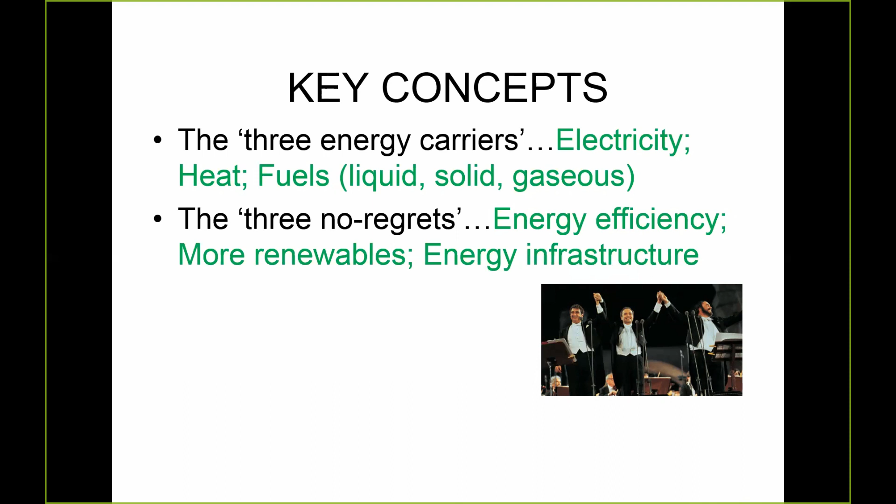Three no regrets - this comes from the European Union. They adopted this as policy some years ago, that whatever the outcome in the future, there was no problem with energy efficiency. I'm not going to say much about energy efficiency except to say that's a given, and any smart energy system will focus on energy efficiency in the first instance. More renewables, no regrets about that. And improved and more energy infrastructure, appropriate to the new system.

And as I was writing this, I thought about the three tenors. I thought, oops, and then I thought maybe I could put a photo of the three tenors in there just as an aide-memoire to the idea that there are these various groups of three ideas - and to think about their wonderful music as well.

So now there are three other ideas which come into this. Energy storage, which becomes increasingly important - the more renewables, particularly variable renewables like solar and wind, and to some extent hydro, in the system, the more important storage becomes. Allied with that is the idea of energy spillage. If we have enough storage in an energy system, there'll be no spillage, but sometimes there's not enough storage, or sometimes it's too expensive to have enough energy storage.

In some cases, we might even want to design a system deliberately to have spill - that's something I'll elaborate on further in the talk. And the third of this last group: energetics, a way of evaluating the success of the system. I'm not going to talk about economics as a way of evaluating success. As an engineer, I'm interested in the laws of physics, the laws of thermodynamics, and how they relate to our assessment of the system - that's what I'll be focusing on.

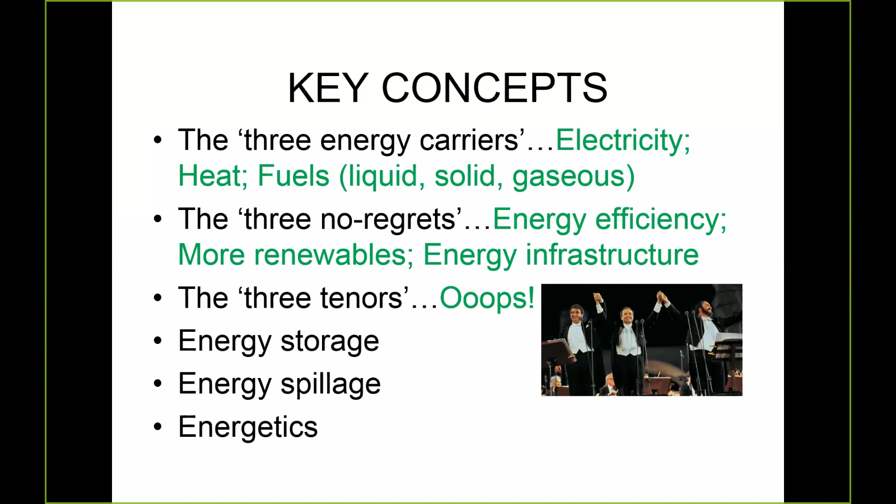I want to have a closer look now at our energy resources. In the left-hand column there, you can see the main ones listed.

So we've got solar, wind, hydro, biomass, geothermal, and the key conversion technologies there. What I want to do is look at the energy products from each of these.

Firstly, solar thermal produces heat, generally low-grade heat. Solar PV and concentrating solar thermal produce electricity. Wind, electricity. Hydro, electricity. Biomass is interesting because it gives us a variety of options, but electricity is one of those. We can produce hot gases by burning stuff, and we can get liquid and solid fuels out of the biomass resource. The wave and tidal machines can produce electricity, and geothermal gives us electricity and heat as well.

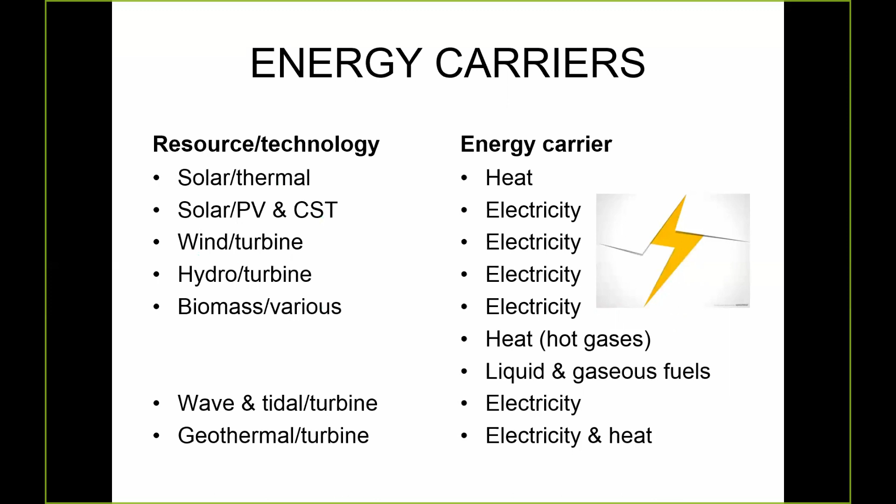In terms of energetics, we have this term called energy returned on energy invested. You may remember from some years ago, people talked about making ethanol from corn and how it didn't break even on an energy basis. I think those days are gone.

As anybody that's worked in this field knows, this is derived from life cycle analyses, and that's fraught with difficulties. It depends where you draw the system boundaries, what sort of data you have, and a whole lot of other factors. And what it means is you can get a very wide range of figures for the EROI values.

So the Americans talk about energy return on investment. I like to be a bit more specific: energy return on energy invested. But we need to take this with a grain of salt, though there is a general trend. Generally speaking, hydro is better than wind. Wind is better than some of the biomass conversions. They're better than geothermal to electricity, and that's better than PV, and that's better than other biomass. So going back to the laws of physics, it really behoves us to use the technology and the resource with the highest EROI value, if we have the choice, in order to do that.

Now, there are other factors involved as well, such as greenhouse gas emissions and land area requirements, which can tweak that order somewhat. So generally speaking, I'm going to go ahead on the assumption that this is a sensible order of choice of technologies to make.

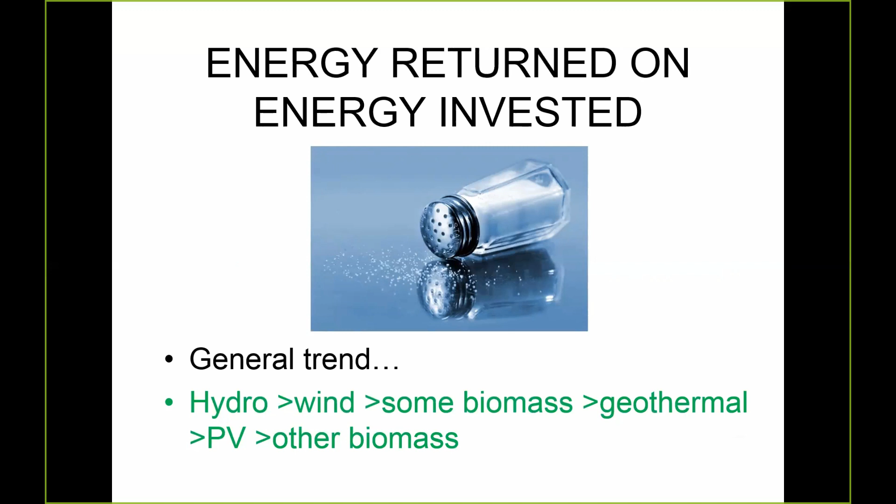So what's a smart energy system? I'm going to take the definition from this paper by Danish researchers, Mathiesen, and you might know the name Henrik Lund. He's been kind of the grandfather of energy systems research over the last decades, a really powerful figure. Very interestingly, he's in the Department of Planning, not an engineer as such. But I think this is one of the most important papers that's appeared in the energy literature over the last 10 years.

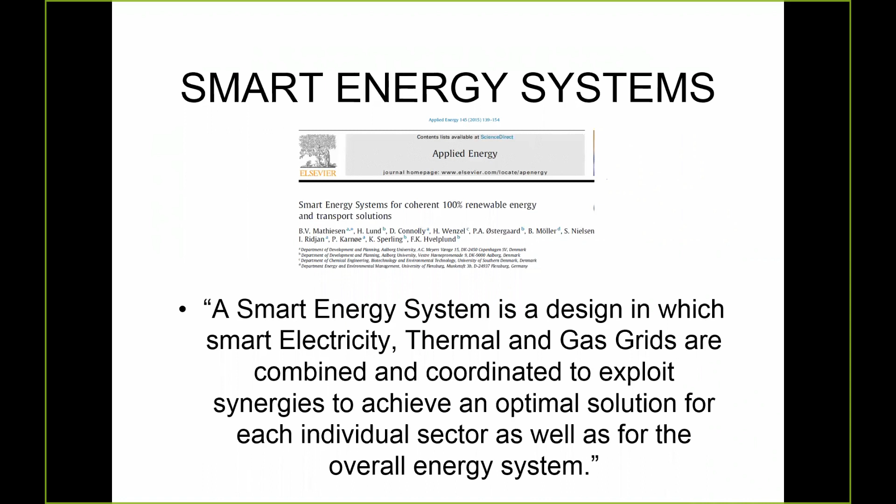Their definition of a smart energy system is this, and I'll just read it out so we can get a good feeling for what it is. It's a design in which smart electricity, thermal and gas grids, with emphasis on the grids, are combined and coordinated to exploit the synergies between them to achieve an optimal solution for each individual sector, but also for the system as a whole. That's what really interests and excites me, this idea of optimizing the interactions between these various energy carriers.

The Danes have been working on this for a number of years, since about 2006. They really got serious about being free of fossil fuels by 2050. That was their idea, and that's still government policy in Denmark at the moment. Their Climate Commission reported in 2010 and came up with this diagram.

I'm not going to go through it all in detail, but there's a few key things to note here. First, electricity from wind is one of their primary energy resources looking to the future, and also using quite a large amount of biomass. But we can also note a little bit of wave, some solar panels, some solar thermal, use of heat pumps, and use of geothermal.

This is combined heat and power plant, so that's electricity plus heat output, with large thermal storage—very large hot water tanks, basically—using district heating in built-up areas, industry being part of it, and electrification of transport to some extent as well.

There's one key thing I want to focus on: Denmark has a land border with Germany, it's close to Norway and Sweden, and they're even talking about building an HVDC cable across to the UK. So they can balance their electricity system easily by importing and exporting electricity with other countries. They use Norway as their storage system - they sell cheaply to Norway, and then the Norwegians sell it back to them at a high price. That's the beauty of the market, I guess.

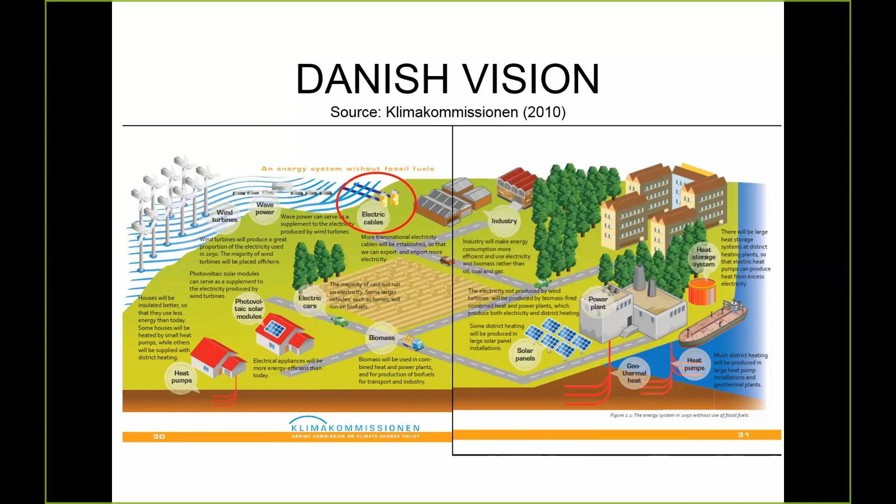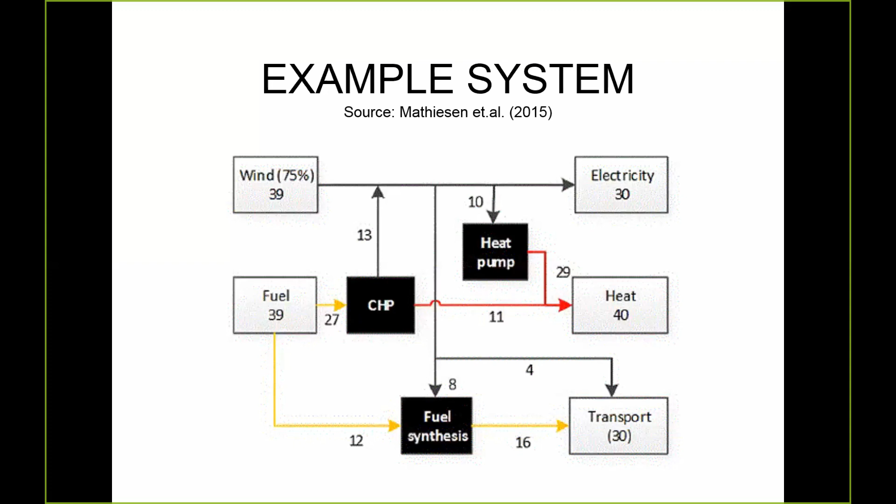Now this is for Denmark. The highest point in Denmark is just about 200 metres, I think, or maybe a little less. So as I said, they use Norway as the storage system. In New Zealand, we're lucky - we've got a very large battery called the Hydro Lake. It's about 4,000 gigawatt hours available. And so that's how we can balance our electricity system in large part.

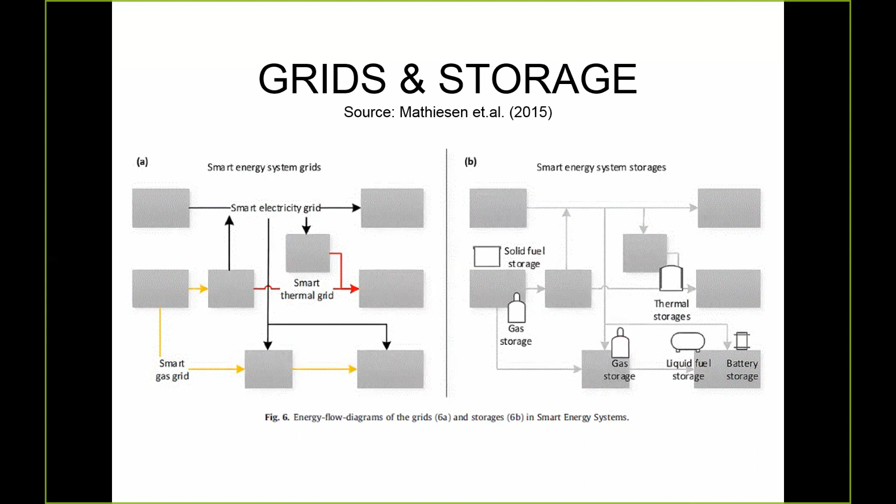So that's the general idea of the smart energy system and the idea of the interactions between the various sectors.

So those last categories, they make up very little individually, but you add them all together and they become quite a significant part of the whole mix. So it's worth thinking about those because of the accumulative effect.

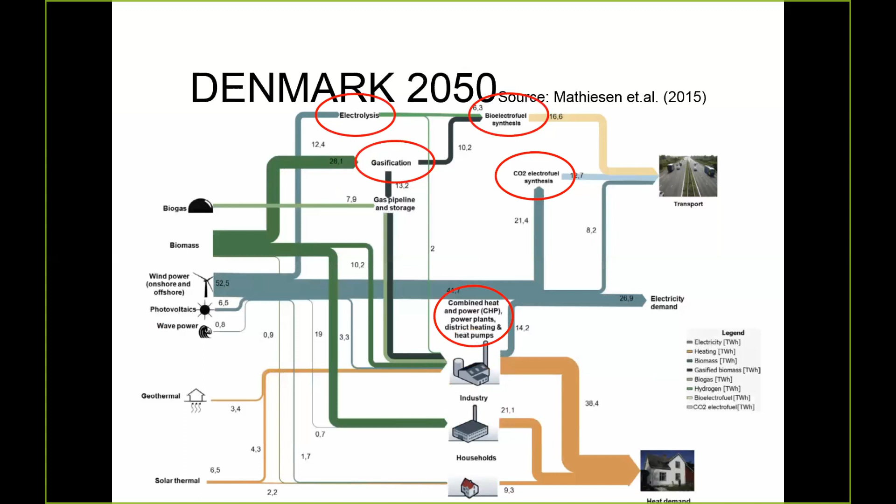Combined heat and power plants are a key feature of the Danish system, along with district heating and heat pumps. So that's the idea of interrelationships being quantified and the relative size of the resources in their particular role.

So I want to leave Denmark behind now and come to New Zealand and see what are the prospects for us to start thinking about such a system. How do we compare with Denmark? Well, we've got much better solar and wind resources than they have. We've got a milder climate, we're a bigger land area, we're a slightly smaller population. So if the Danes can do it, surely we can do it.

But we do have some disadvantages. We're not linked to any other country in terms of electricity. Although I believe people have talked about an HVDC link to Australia, but well, they have telecoms cables, so why not? But that's a long way off, if ever.

We tend not to have district heating. We have it in hospitals, we have it in universities, but we don't have it on a big scale. So combined heat and power probably isn't something that's going to work well for us, at least not with our present infrastructure. We have a gas grid in the North Island, but not in the South Island.

One of the things the Danes really cottoned on to was the economic opportunities to develop new industries, expertise, and products, and sell those to the world, and they've been quite successful in doing that. But we're a long way from markets, so we have to think seriously about what we can actually produce, and what expertise do we have on which to build, which the Danes and the Germans and others who are really leading the charge in this area, don't have.

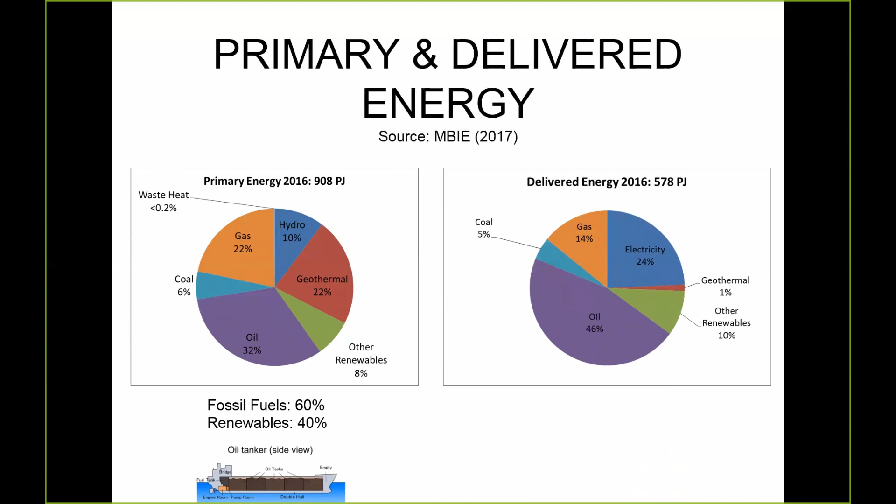In terms of delivered energy after the energy conversions, it's still pretty much the same picture here, still dominated by oil, mainly in the transport industry, some coal, some gas. You see the geothermal has really shrunk there - some proportion has gone into the electricity sector, so that 1% is just the heat used in geothermal applications in some parts of the country. So that's where we're starting from.

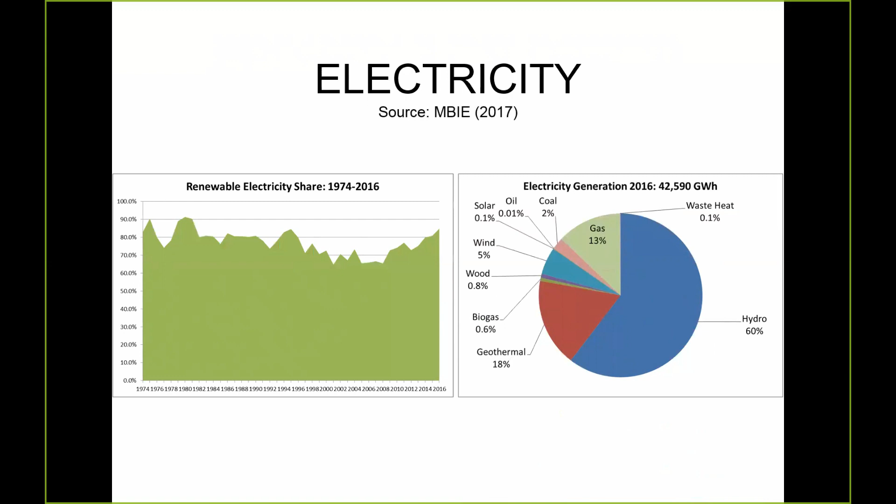In terms of the electricity sector, we've been quite highly renewable in the past. I think if you go back to the 1950s, we were 100% renewable at times there. In 2016, we produced about 42,000 gigawatt hours of electricity, primarily from hydro, with a large proportion from geothermal, and large proportion from gas, and then minor contributions from other bits and pieces of renewables. That all adds up to 85% renewable electricity and 15% on fossil fuels.

What we're seeing now is a move towards 90% and over 90%. My own argument is that 100% renewable electricity is well on the way. It's happening. There's a little bit of fine-tuning to do, but it's really not the major challenge which we face anymore.

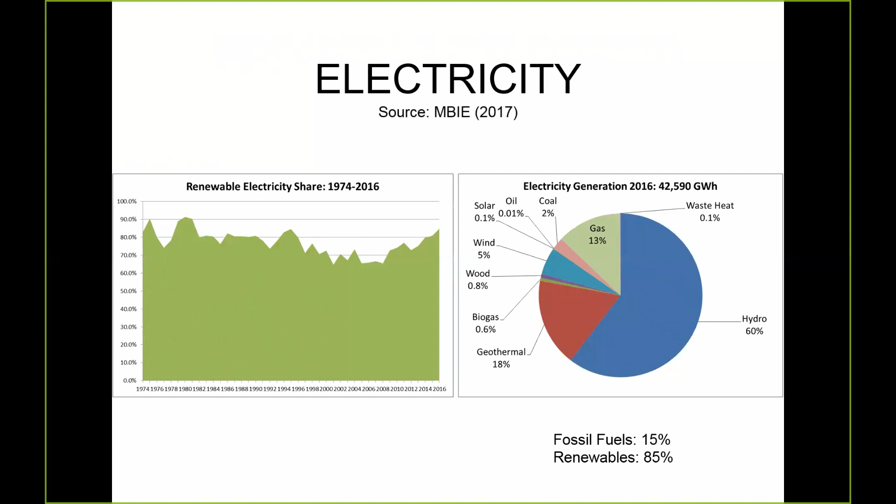So I'd like to talk about some arguments which were put forward by us some years ago as to whether we could have 100% renewable electricity. I'm doing this as a basis for a largely electric energy system. So if we can get the current electricity sector to 100%, then we should be able to use that information and knowledge to get the energy sector close to 100%.

So we studied for 6 years. It took data at 30-minute intervals and removed all the fossil fuel generation from the energy mix in the electricity sector, and we added in wind and geothermal.

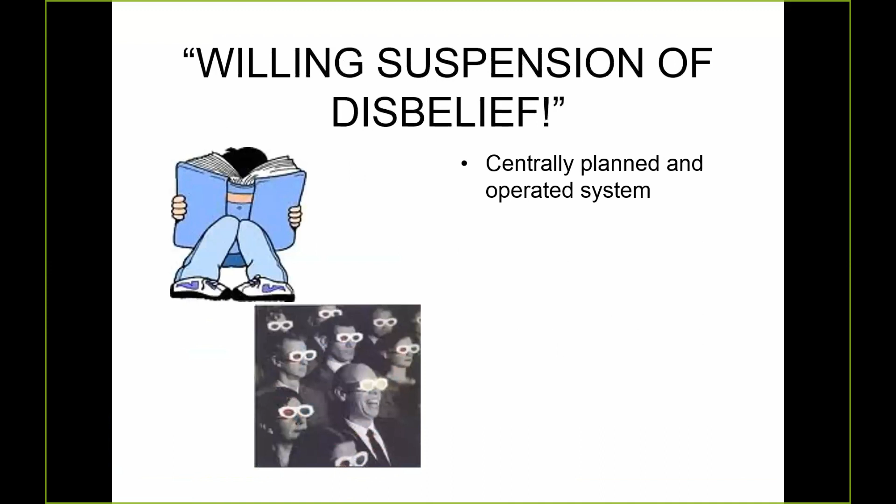There's a number of assumptions in the study. First, that the whole system is centrally planned and operated, and that the single goal people had was just to make the best use of the energy resources, and that included minimising spillage. So there's no market involved in here.

We varied the hydros in response to the availability of wind - so when wind was up, hydro was down, and vice versa. That was varied from the historical way the hydro lakes were operated. And we treated the hydros as one big bucket. The argument there was that they're not connected geographically, but they are connected electrically. So that seemed like a reasonable assumption.

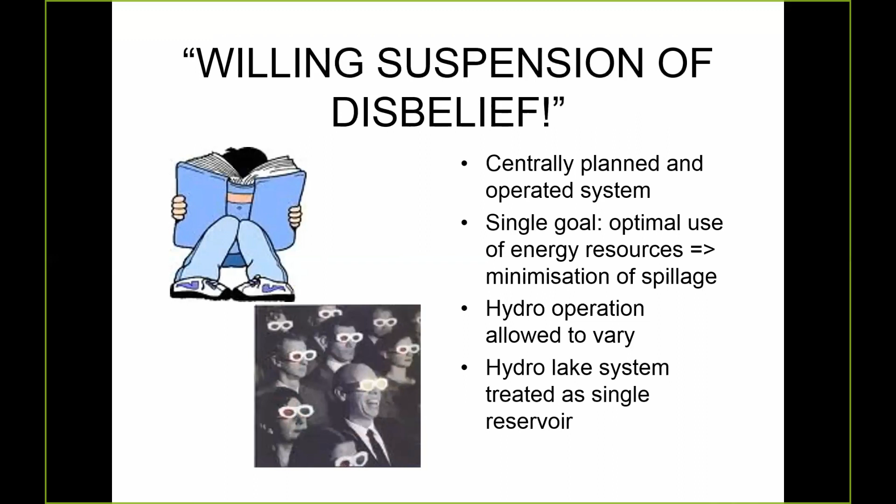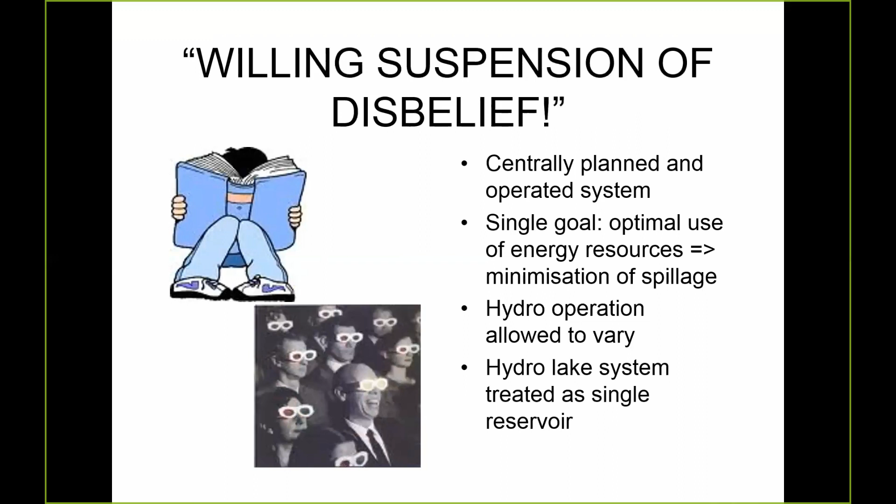A PhD student at the moment has actually separated the North Island and the South Island storage in order to get a more fine-grained analysis. And this is a backcasting study, so we have perfect information.

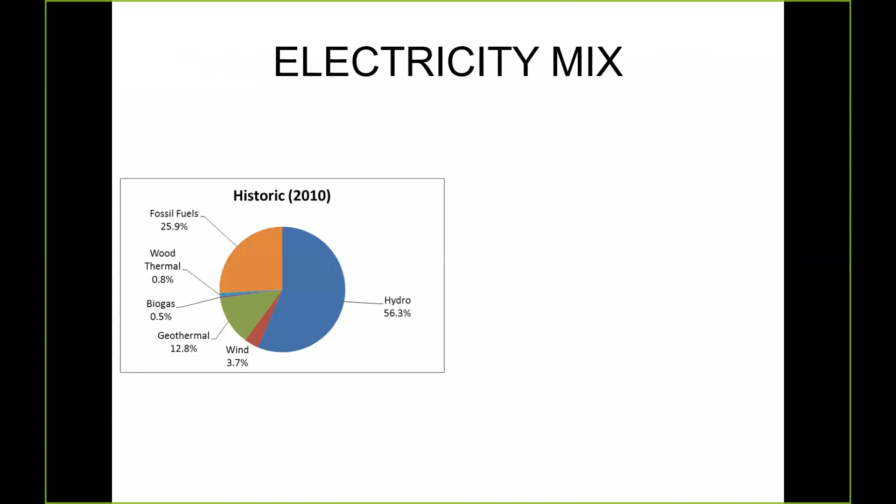This is the historic energy mix from 2010, and it's pretty much the same story that we just saw before in the overview of New Zealand.

With our 100% model, we found that hydro was producing pretty much the same amount, but there was a vastly increased amount of wind. There, a lot more from geothermal, and the biogas and the wood thermal were just as they were - they weren't altered at all, so they're still very, very small contributors.

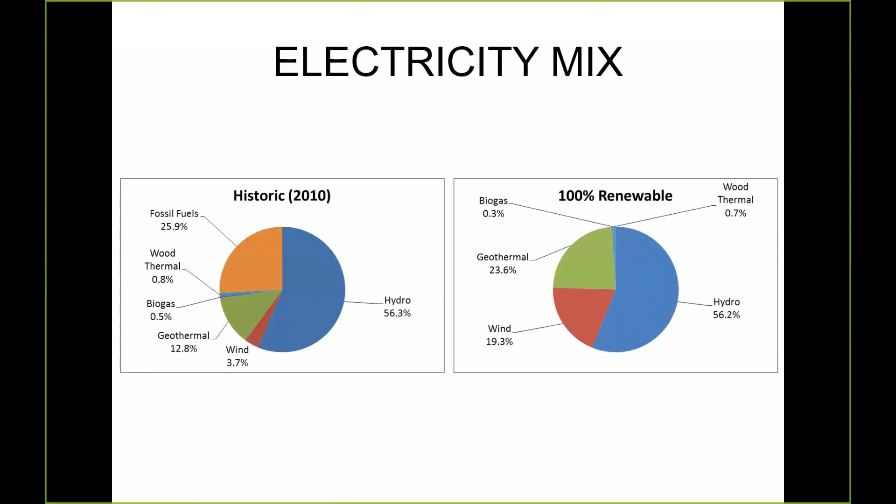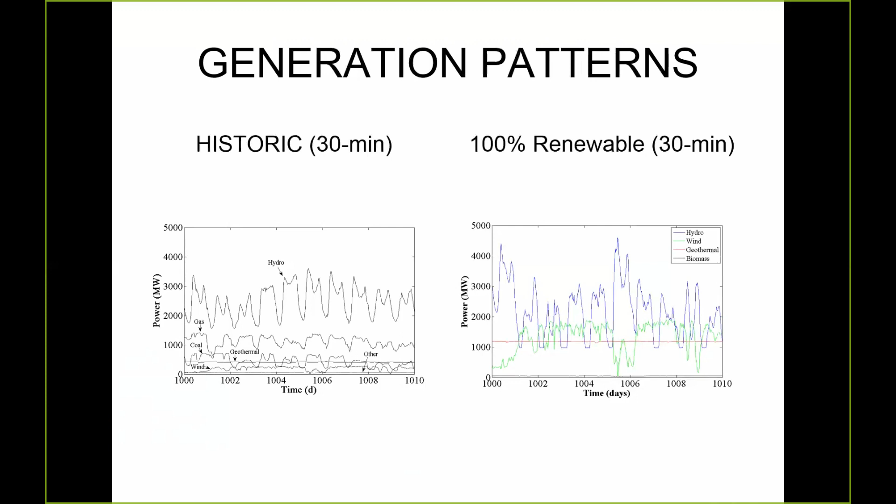And the geothermal is increased here, and we just operated that at constant base load. Now, geothermal can be dispatched, and I'll talk about that just in a moment.

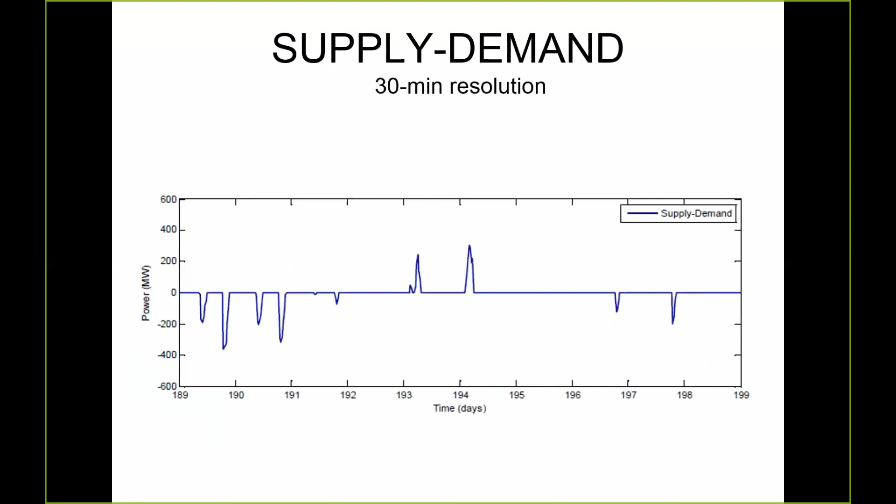In a system like this, there will be periods which produce surplus electricity, and there'll be other periods which produce deficits. So those deficits have to be satisfied. Now, if we're lucky, the amount of surpluses will exceed the amount of deficits, and we can use those surpluses in some kind of storage system to supply the deficits.

So let's see. This is over 6 years. This is the cumulative surpluses over 6 years in gigawatt hours, and this is the cumulative deficits. So we can see, yes, there was plenty of surplus there.

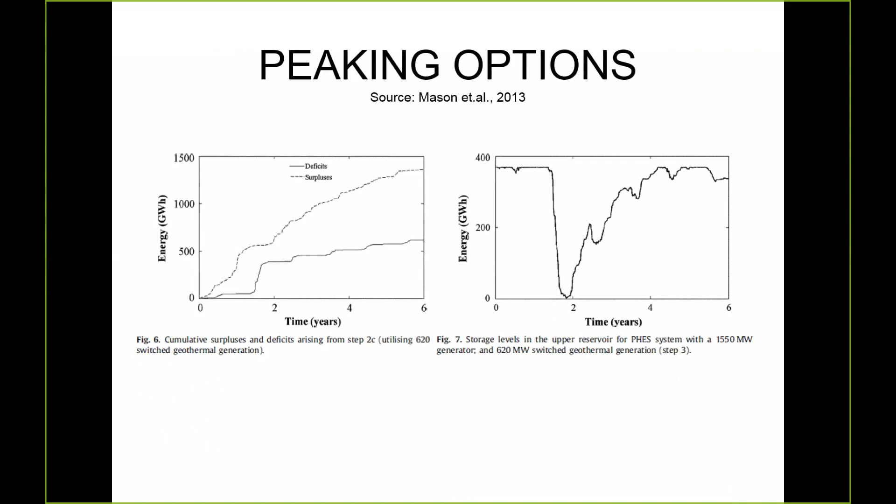So we modelled the pumped hydro storage system over the 6 years, and that had a capacity of 368 gigawatt hours. That's just under 10% of the total hydro storage we have at the moment.

But the interesting thing, and slightly concerning in a way, is the very high capacity required. That's because there are periods when generation has to ramp up very quickly and over a very large range, when the wind drops off, or when demand increases, or if both happen at the same time—you can't control that. As alternatives, we looked at demand-side management to see whether it could alleviate some of this peaking, and it could do some of it, but not all of it.

The other option is to just abandon the 100% renewable idea, and we calculated it would be 99.8% renewable if we use fossil gas in gas turbines as a way of meeting these deficits. I've argued, and continue to argue, I'm not too worried about 100% versus 99.8%. The truth is not very much gas gets burned. We need to maintain the fleet, but we don't burn a lot of gas. There are some commercial challenges around that, but people are starting to talk in that way. There was an item in Energy News just recently arguing the case for gas. So I think that's definitely an option, at least as a transitional measure.

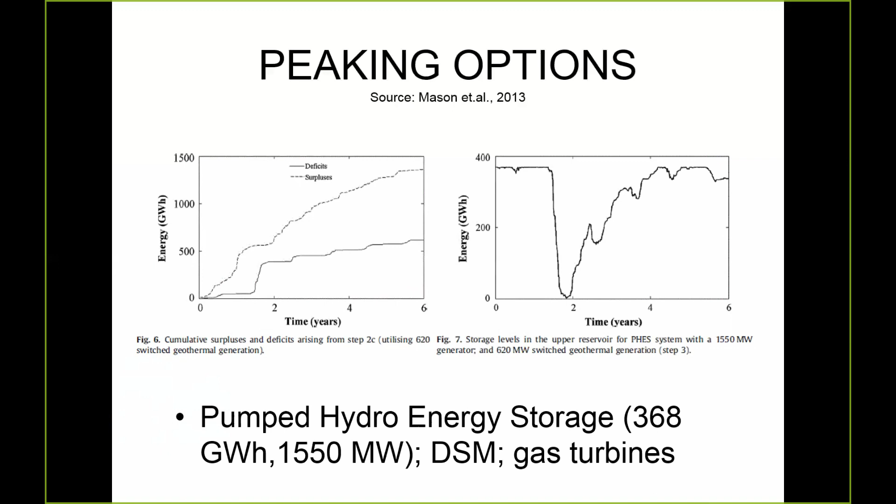It did raise the interesting debate, which I think is still current, of whether it's better to spill water, or to spill wind, or to spill some other energy resource. That's not really resolved. But one thing we can say about geothermal is that resource can stay in the ground—you can turn off the valves and not operate, or operate at lower output, and save that resource for another time. So we're relying on that.

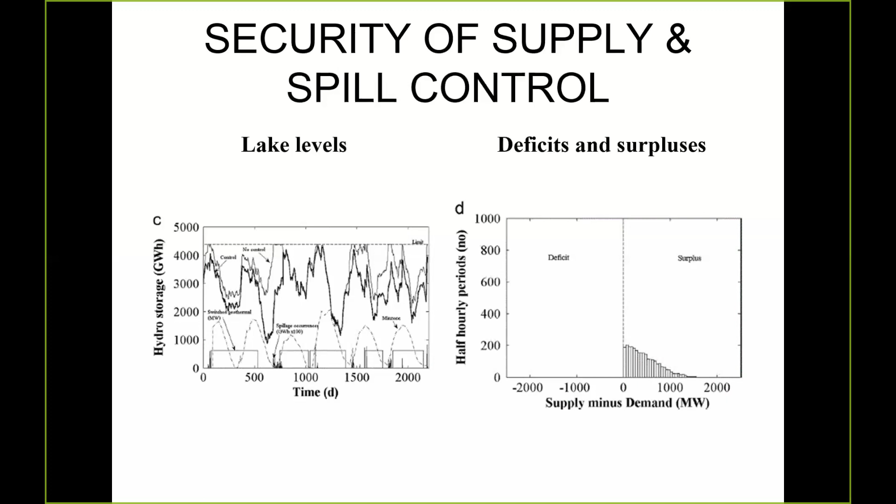Okay, so the argument to this point is that there's good evidence that we can have, at a 30-minute resolution, 100% renewable, or very close to that, electricity system. There are some issues at the sub-30-minute level which need to be addressed, and I'll mention those briefly later on.

But the next interesting thing to consider is whether the storage can be reduced and the whole system can be optimized.

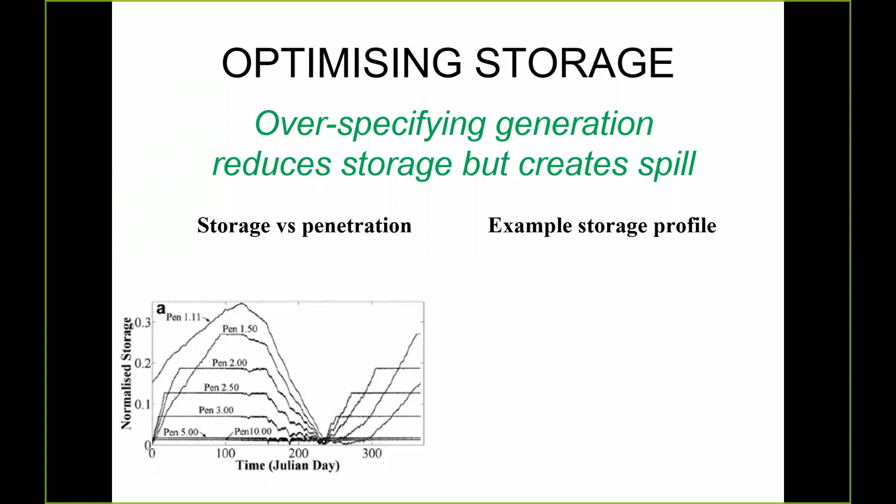So can we reduce this? If we put in twice the number or 3 times the number of panels, then the storage required goes down dramatically. That's because it starts to shave off some of those deficits and makes them a lot less. But it still produces spill. So in an optimized situation, the profile would look like this.

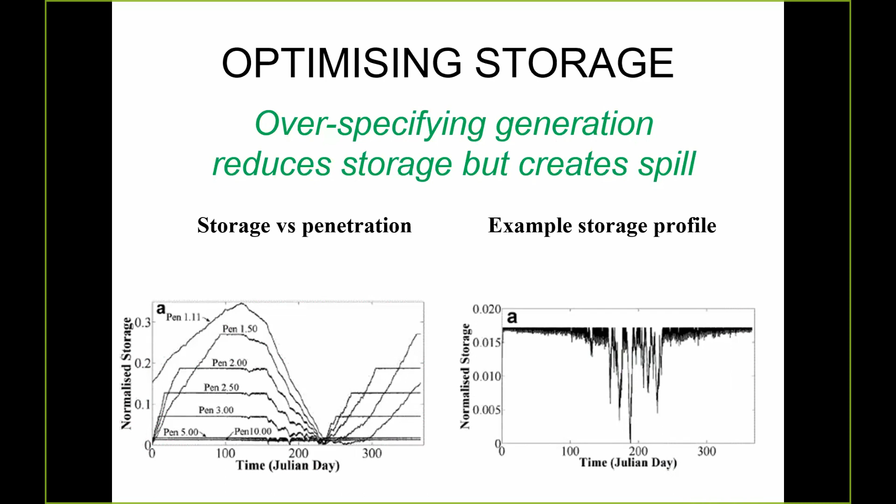This represents spill, where it flatlines along here. This is where it bottoms out. And then this is around September, and then it creeps up again. So that's something I'd like to argue could be built into a smart energy system of the future - to over-specify generation in order to optimize the whole system.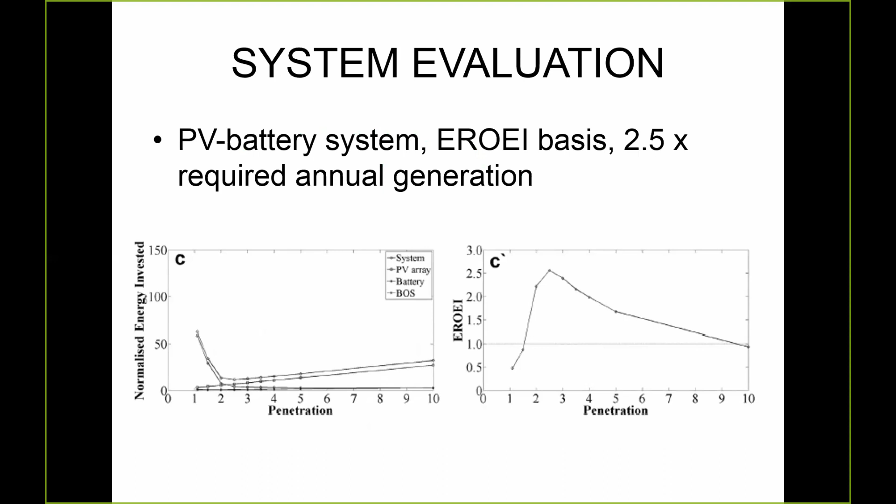So at the end of the day, with high renewables in the system, we're left with periods of time when there'll be surplus. So what to do about it?

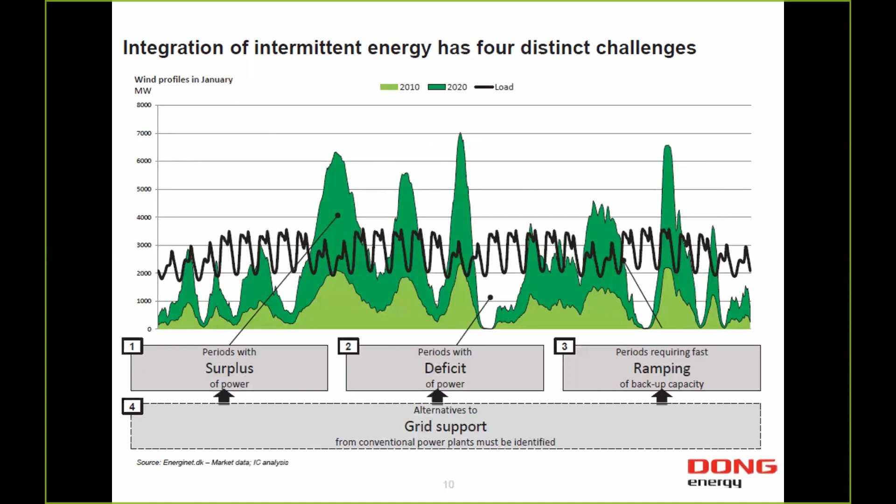We can use that surplus electricity to produce hydrogen and then put it through a fuel cell back to electricity. A lot of researchers, including myself, don't favour this route because of the very low round-trip efficiency.

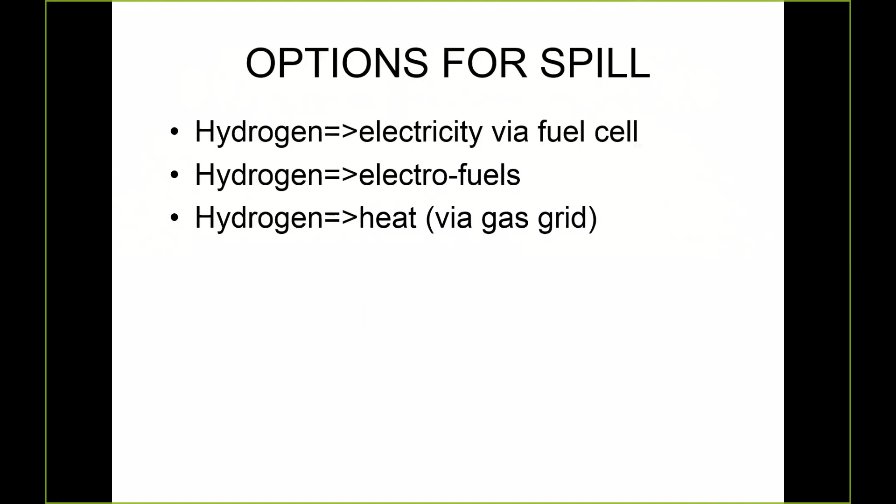We can use hydrogen as an input into electrofuels production, as we saw in the Danish scenario. We can use hydrogen directly as a combustible fuel, and maybe inject it into the gas grid, as they're doing in Northern Europe at the moment. Or thermal storage via heat pumps, which we saw in the previous slide. Just thermal storage in hot water tanks, which we saw in the Danish pretty picture.

Or curtailment. So there's an interesting study, I think, to be done - storage versus curtailment - is there an optimum point at which you curtail versus when you actually use it in some way or other?

So this is a diagram from a North German company, which is taking surplus wind electricity, putting it through an electrolyzer. Wasserstoff is the German word for hydrogen. That's been injected into the gas grid and sold to customers as wind gas. That's going on in many parts of northern Germany at the moment.

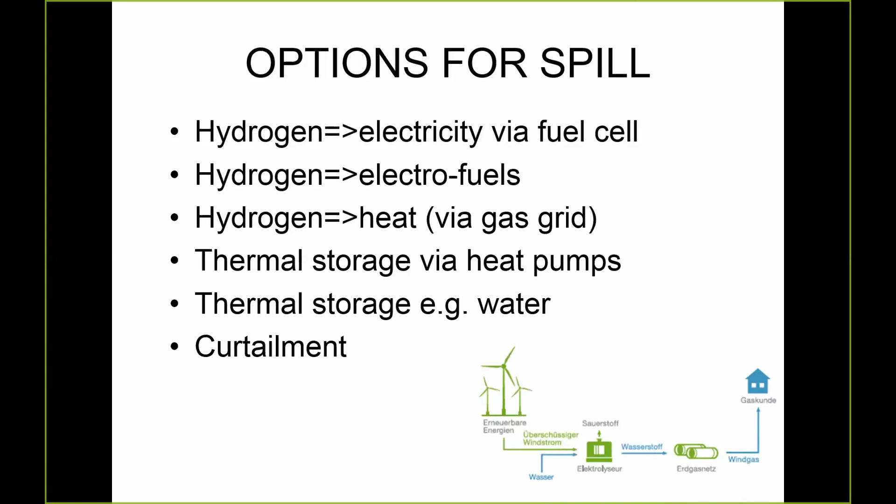So, can be done. Now, what about the question of 100% renewable energy? Moving now from electricity, the next topic is energy in total.

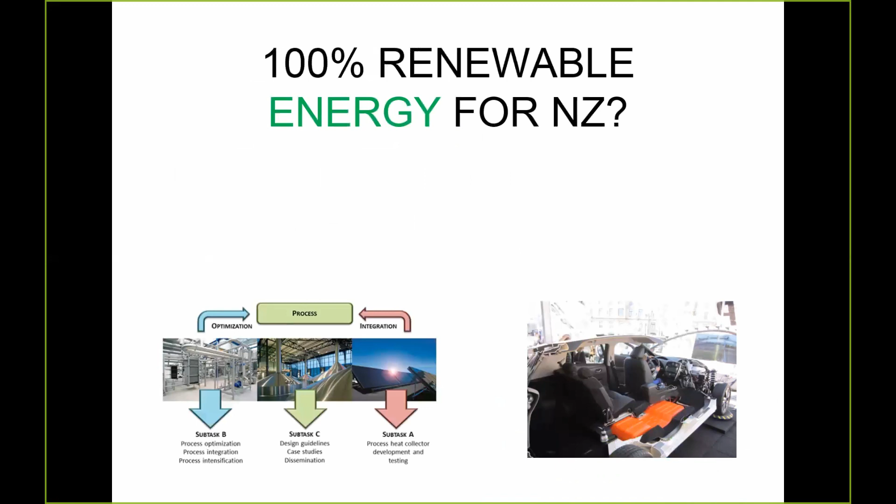Here we've got an industrial process. Here we've got a cutaway of a Nissan Leaf, showing the battery pack in orange. So the idea here is to look at stationary energy and transport.

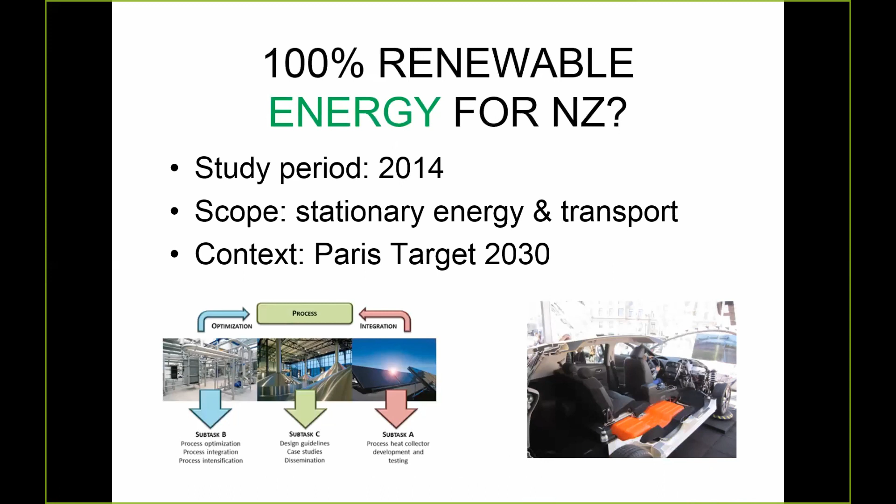This is another study that we did, just looking at 1 year, in the context of the Paris target for New Zealand's greenhouse gas emissions. As many of you know, the New Zealand government has signed up to reduce our emissions by 30% below 2005 levels by 2030.

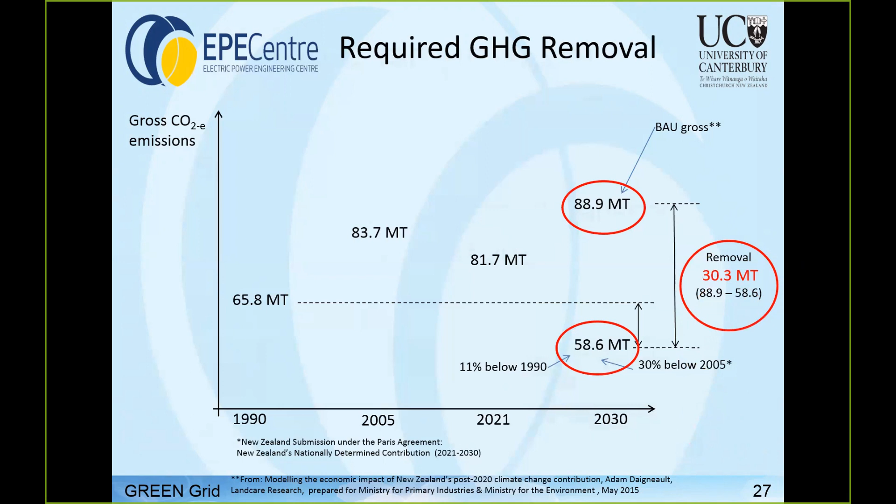excluding transmission and distribution at this stage, and that was about 25 megatons of emissions reduction. Now, if we were to factor in the emissions reduction from 100% renewable electricity into that, that would come to about 30. So in principle, this could be done. We can meet the Paris target by electrifying all stationary energy and transport and completely removing fossil fuels from the electricity system.

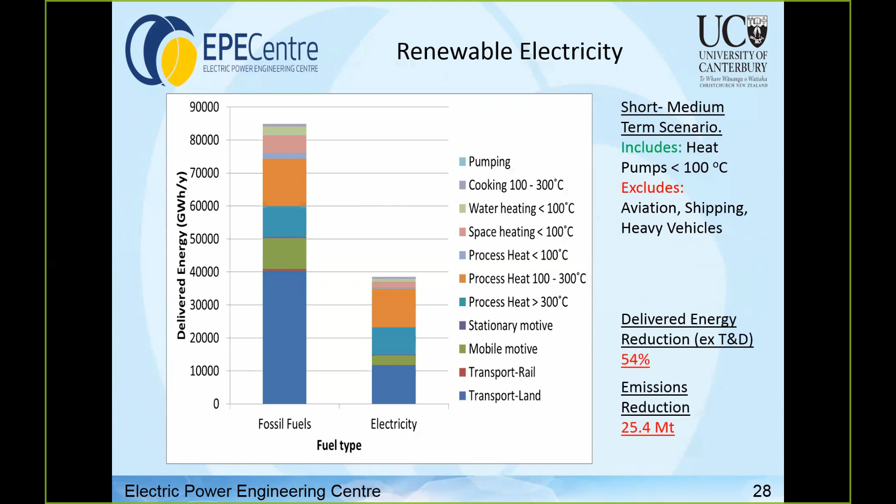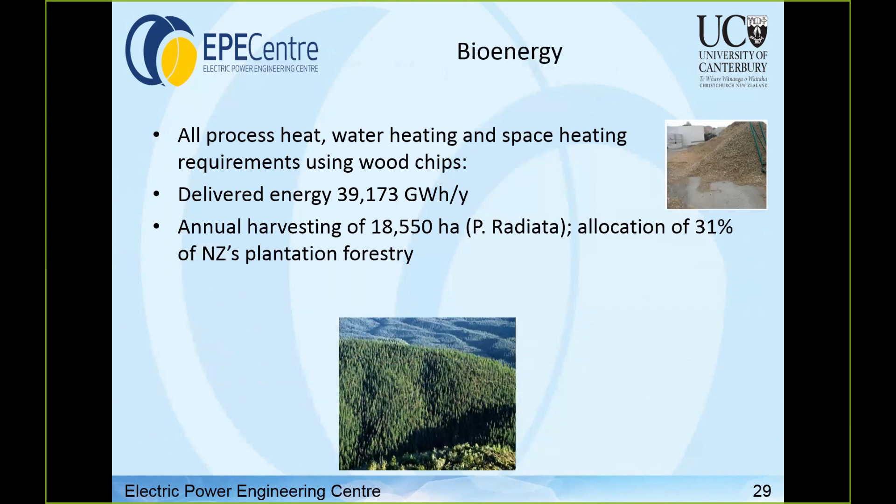What about bioenergy? If we could use wood chips for many of those stationary energy uses, what would it look like? We need about 39,000 gigawatt hours per year of energy in the wood chips. To put that in perspective, it would mean allocating about 30% of New Zealand's plantation forestry just for energy uses. Now, of course, that was just a comparison, not a serious suggestion. There's a lot of other demands on New Zealand's plantation forestry, so I think a lot less biomass will actually be available in the future.

What we found out of this: we'd need about another 42,000 gigawatt hours of electricity in order to cover stationary energy and transport. That's about the same amount as produced in 2014. Now, in terms of availability, there's consented and planned generation in New Zealand at the moment, mainly wind, but a little bit of geothermal. That would give us about 15,000 gigawatt hours. So we need another 27,000.

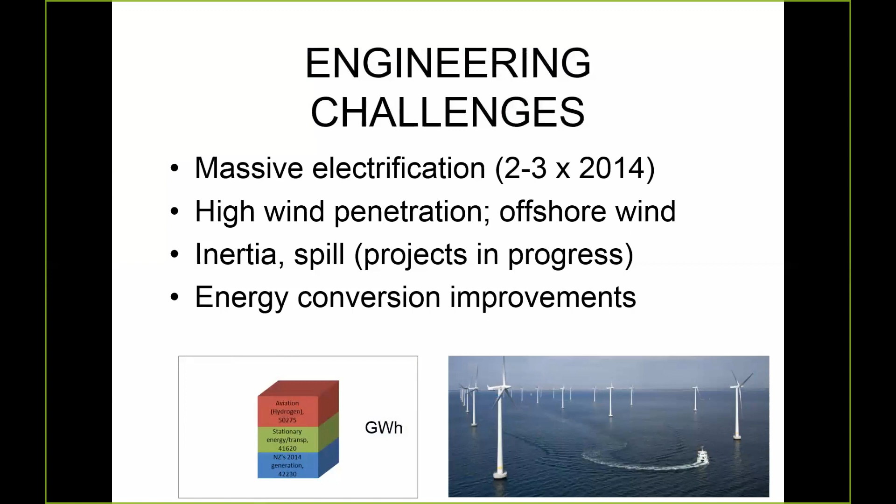Energy conversion - you may remember the slide where we had electrolysis and co-electrolysis and other processes going on. There's a real need for more research in that area, particularly to improve efficiencies and look at the real-time operation of those systems. Storage, the role of bioenergy, and the build rate out to 2050 are all important challenges for engineers to get to grips with.

But I think in any event, we need to get used to more sites like this as possibilities in our seascapes in the future. This is just off Copenhagen, looking out towards Sweden, and this is quite a small wind farm - I think it's only about 40 megawatts or something like that. The turbines are now much, much bigger than that.

What's the acreage? What's the acreage for a farm like that? I don't know for sure.

I think the important thing about wind farms is that whatever land the wind farm occupies, very, very little of it is actually taken out of use. In fact, farmers get paid royalties for having a wind farm on their land, and then they can graze sheep or put animals under there or even grow crops. So it doesn't take the land out of production - it just has two uses instead of one.

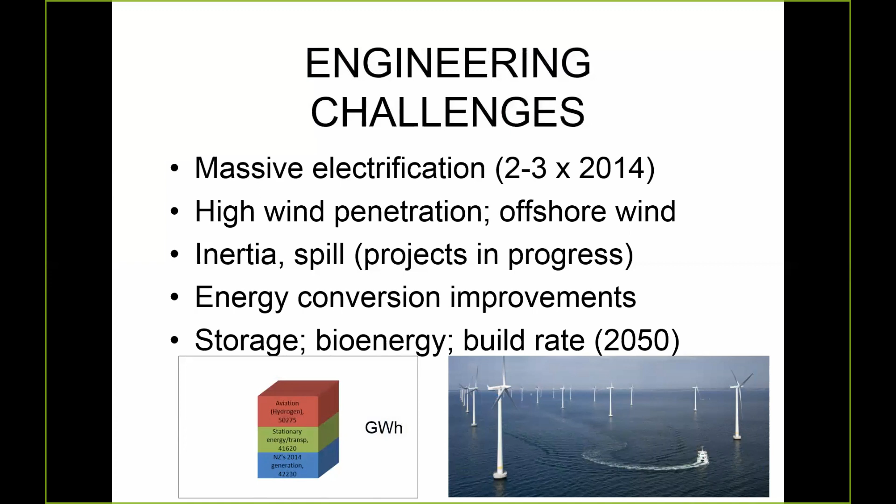Okay, so those are some of the engineering challenges I see ahead of us if we move towards a smart energy system, but there's some social science issues as well. I think there's a need for some scenario reframing in terms of how we approach people's reactions to this new infrastructure. I would argue we're going to need more wind turbines and more pylons on the landscape. Normally when we discuss or survey people, it's: do you like this view without the wind turbine, or do you like the view with the wind turbine? I don't think that's appropriate anymore as we face the impacts of climate change.

I'd like to see experiments done where people are asked: do you like this? Or do you like this? Or do you like this? Which one would you rather have? Or would you rather have your electricity distribution system collapsing on a regular basis and having electricity outages?

Now, that's not as simple as it sounds, but I think it's something we can work through with the social science community. I think another big challenge - and some of my best friends are social scientists - but I have to say they're very good at explaining what's wrong and telling you why it can never be different. But environmental psychologists are really good at designing interventions and how we can change people's behaviours or reactions in a positive way. Social comparison is one of the most promising approaches in the literature. So I'd like to see more focus on interventions to bring people around to the realities involved here.

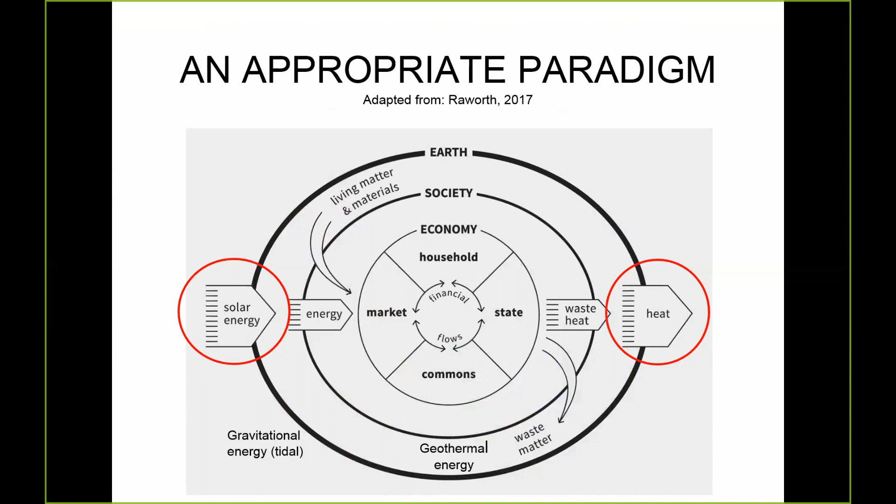We have some small contributions from tidal and geothermal. Coming back to the laws of physics, we know from the second law, the entropy law, that this is inevitable, that there'll be a discharge of heat back into the universe again. You might be wondering where wind, solar and the others are. Wind, hydro and biomass are all second-hand solar. Wave energy is third-hand solar, so it all relates back to solar. So they're all in there.

The problem and challenge we face is we have this insulating blanket with warming temperatures. In terms of the economy, traditionally it's been a relationship between businesses and households. That's how it's traditionally portrayed.

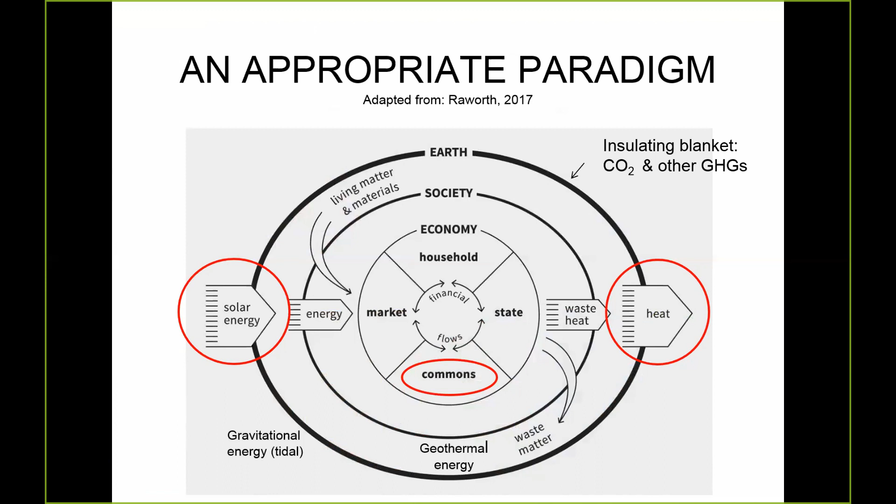But I just draw your attention to the inclusion of the commons in this particular model, which is why I think it's particularly appropriate for us going forward. I think this is a good paradigm to be going forward into the future with.

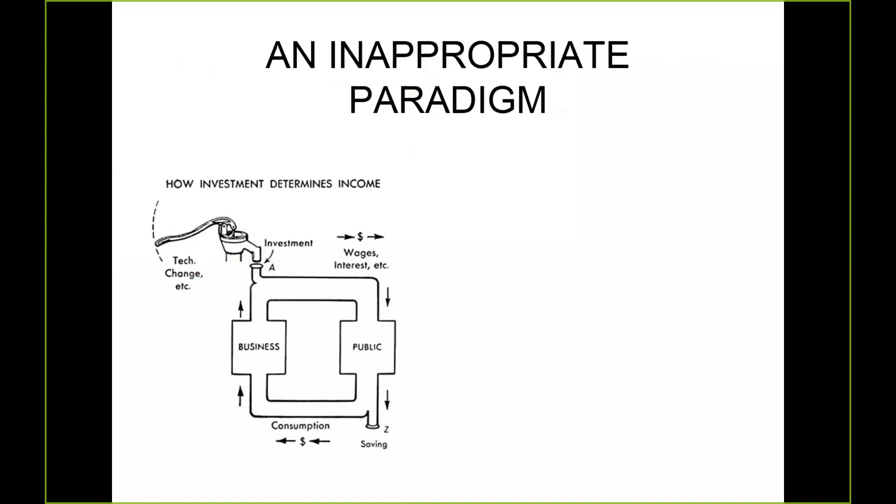But I think the key thing about this model of the economy is that there's no connection with the physical world. There's no connection with energy. There's no consideration of the laws of thermodynamics. And I struggle to see how this is compatible with the ideas around a sustainable future.

So that leads on to some policy challenges. First thing I'd like to see and argue for is a fully integrated energy policy, which aligns with the idea of a smart energy system. Instead of energy in silos, we have energy interrelationships and things connected together and flows going between the various sectors.

The electricity system is governed by the Electricity Authority at the moment, and that has very limited responsibilities. It's just tasked with keeping the market in order and keeping the market functioning smoothly. If one was to go back and look at the Electricity Commission which preceded it, then that had a much wider scope of responsibilities. And I think there's a good argument for returning to that model as we move forward.

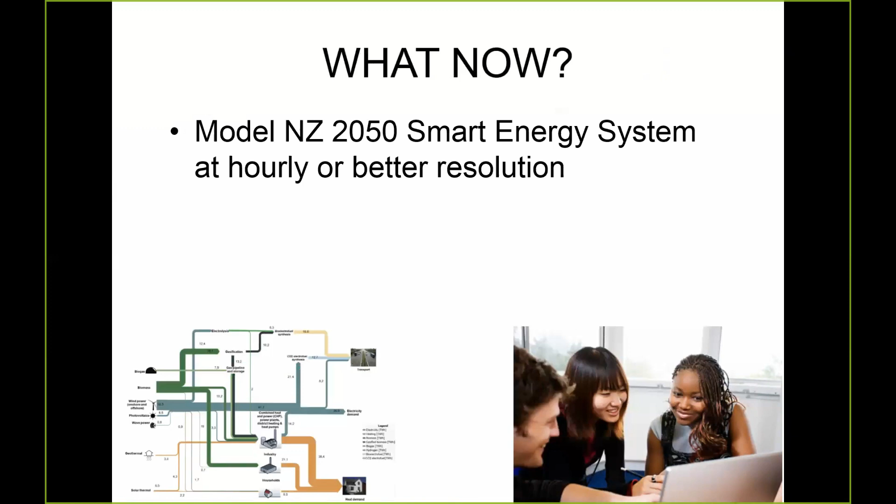So what next? First thing I'd like to do as a systems engineer is model the whole of New Zealand in the same way that we saw previously. This is a Sankey diagram, it's called. Produced one of these for New Zealand at very fine resolution. I'd like to see more discussion around the framing of social science experiments and a focus on developing appropriate policies. And let's continue the conversation.